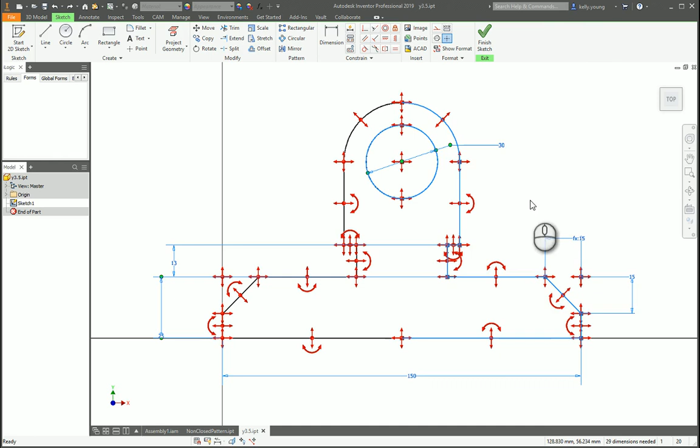Hey there, Fred. So looks like you basically mirrored this part over. There's a couple issues, so I'll kind of go over them. First off, you have a ton of degrees of freedom. Also, you mirrored the circle as well. So if we select this right side and just delete it, you'll see you basically sketch over here.

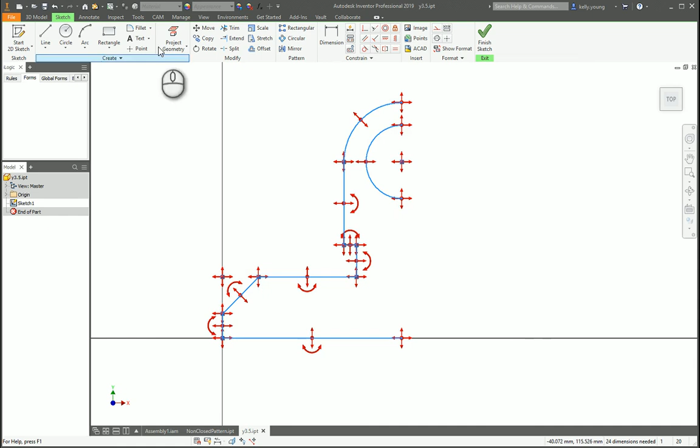One way to get this going, first off, I would say is grab all your stuff. Here's your center line. So basically, what we can do is let's just move all this over here, go to our origin, get our center point back in. So there's your center point. So basically grab all your stuff and then move it from the base point here to the center.

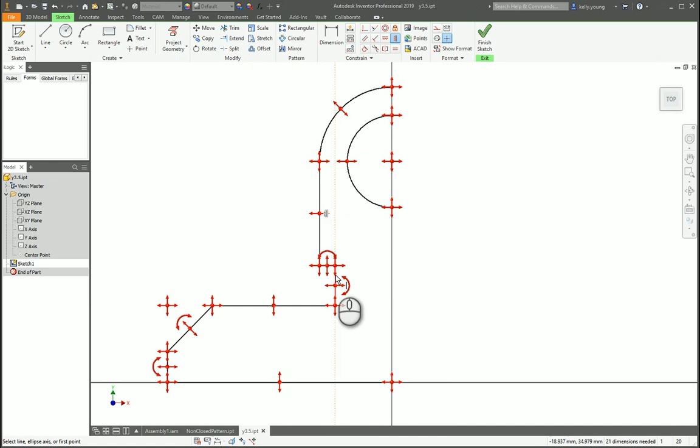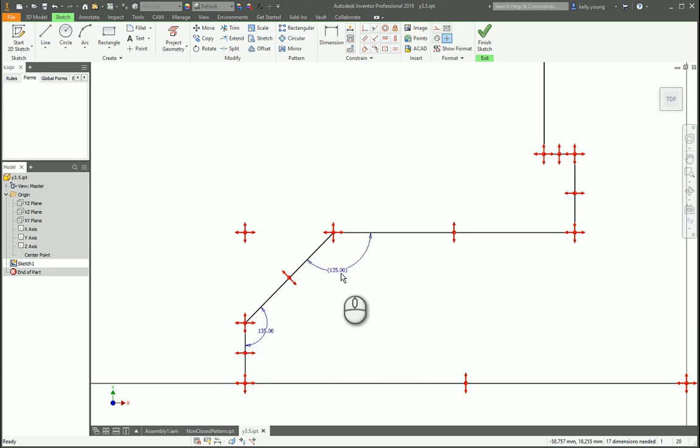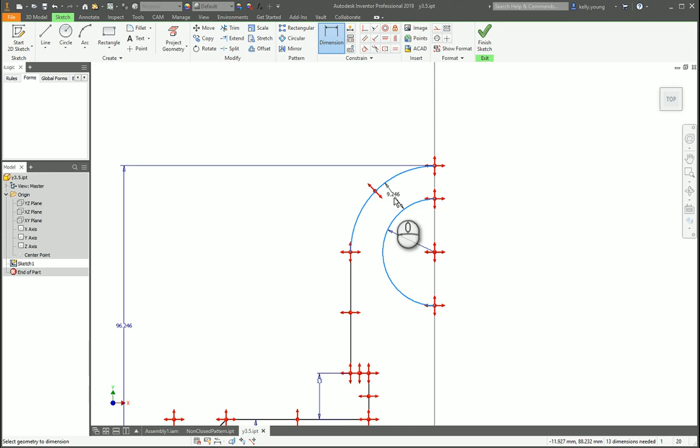So now you'll notice that some of these have degrees of freedom. So we'll just take some of these off because you know that they're going to be vertical. Two lines on there. Okay. So let's start setting up some of your dimensions. Not sure what that one's about. So there's something with that because that's a weird number.

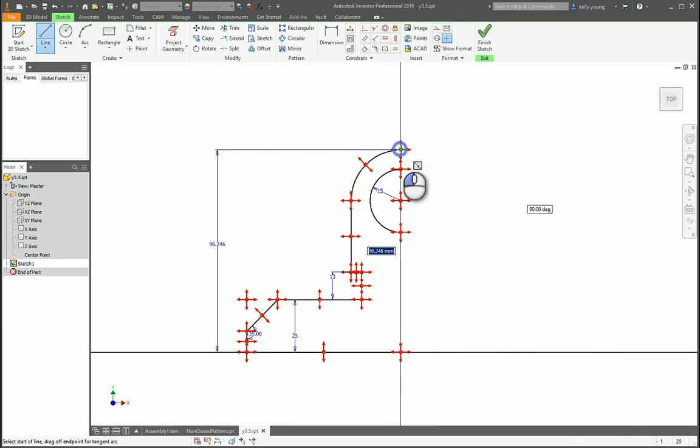But really what you're asking is how to mirror all the stuff. I would say probably grab all these. No, actually not that one. Let's do a line from the center as a construction line. Mirror. So you do these in line with each other, which looks like you already have mirrored. Yeah.

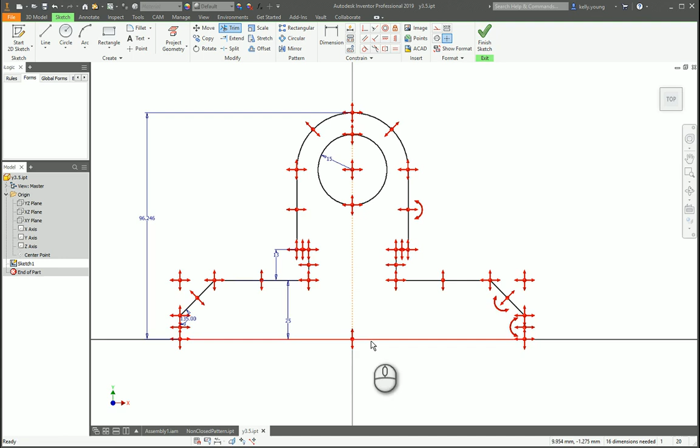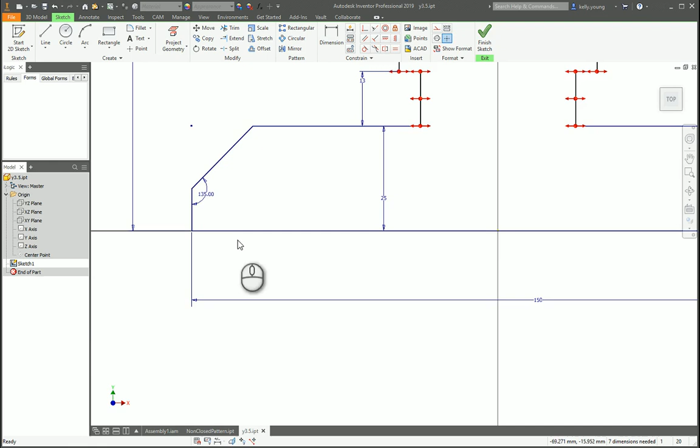So if you press X and hold Shift, you'll then extend it across. There you go. So now you have your dimension to here, 150. So constraining your baseline to the center point at the middle is going to be the most beneficial thing you can do to start. So if you know that a part is going to be symmetric, make sure you constrain it to the center point.

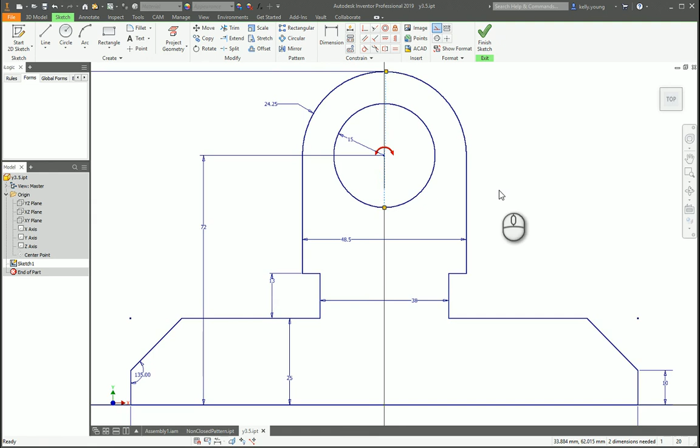So we're just going to go through and change some of these dimensions up, lock them in. Now your center point here, right now you got two arcs. I wouldn't recommend really doing that. If it's ever going to be a circle, make it a circle. So in this case, the degrees of freedom are going left and right on the point because it's two arcs and they're not constrained. So we're just going to delete these out and then also delete out the top arc and make it a single arc. It doesn't involve redrawing the thing.

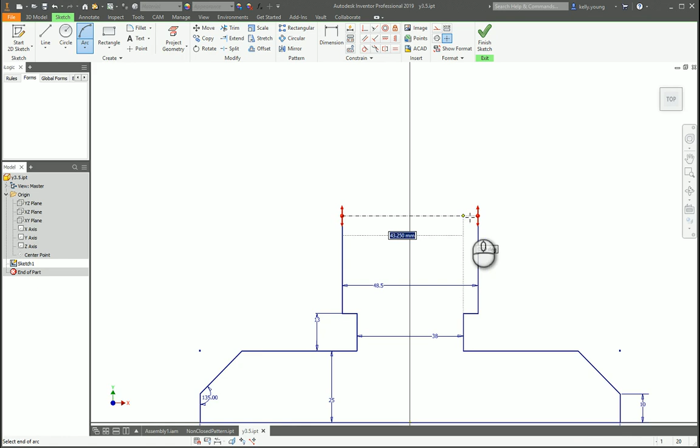So keep your sketches simple and use as limited an amount of dimensions as you can. A lot of times I'll go back and actually redraw the entire sketch once I have the main shape down. Sounds like extra work, but in the long run, once you have your fully defined sketch with minimal dimensions, it'll make it a lot easier in the future.